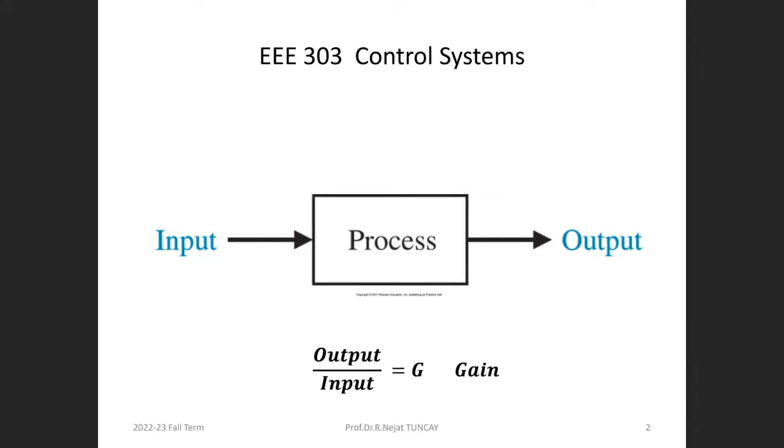I'm sorry. Yes, that's much better now.

Now, input is actually what you wish, and output is the result in every control system. That is your wish, your desire, that is your input. Now we judge whether this output is good enough. You always judge that in every part of your life. If that output is not satisfactory, not the one you expect, what are you going to do? What we do is the subject of the control system. So control system is all about the output being what you require, being equal to what you wish.

A simple example: NASA, for example, sends a missile. You already know that one. Send a missile to a device in orbit and try to hit it with that missile. So this is a control system. If you cannot give the correct trajectory, the correct speed, and also the measures of the space where it is, you cannot hit it. So this is a simple control problem.

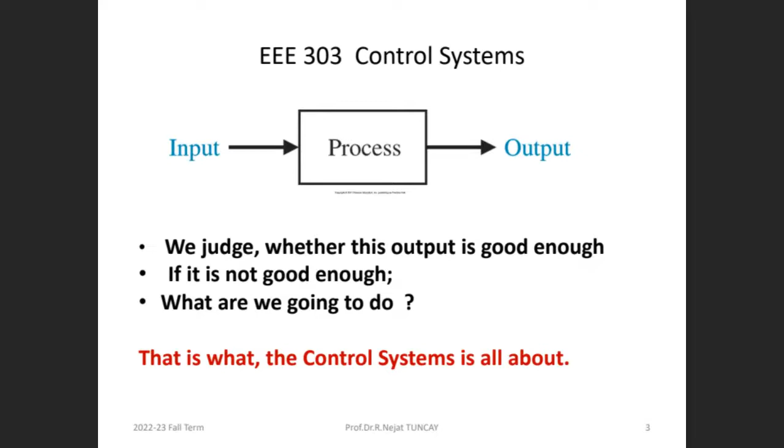If you have 3 blocks like this, or more than 1 block, you remember, if you go back, that one is gain. There is only one output-input relationship. But if you have a number of systems together, then it is called a transfer function. Output divided by input. Don't forget that one. Transfer function. I continue.

We are not happy about this open loop system. Since we just send a signal here or we just give the order here, at the end we obtain, for example, we require a speed for a car of 50 kilometers per hour. However, we control the gas, but it says 60 kilometers per hour. What are you going to do? Then you have to get a signal from there to see whether this output is exactly equal to this required input or not.

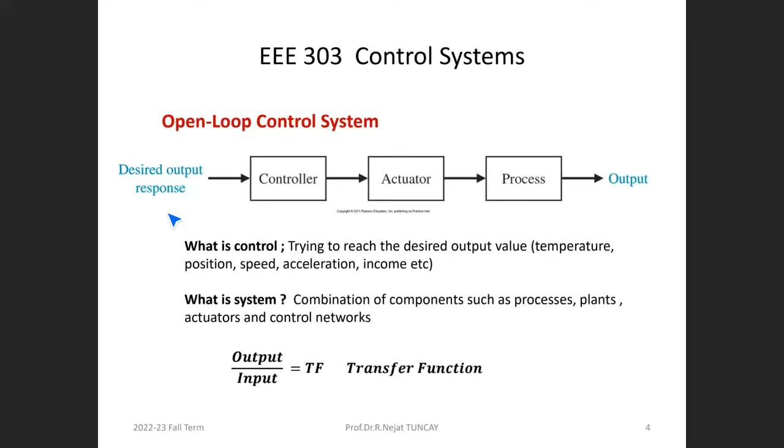I repeat the sentence. This open loop system is not a good control system. Of course you can measure the output, but it cannot be compared with your input. However, if you look at that system, this is a closed loop feedback system. This is the required input and this is the actual output, and you measure the difference, the speed, for example. And of course sensors also have a system. There are equations in it. There are equations in the controller. There are equations in the actuator. I'm sorry.

And you can see that as a result of this one, you obtain a speed of 60 kilometers per hour. However, you wish 50 kilometers per hour, or let's say 80 kilometers per hour, but this is 60 kilometers per hour. So when you measure this one and compare it with the input, 80 minus 60, 20 kilometers per hour is an error. The difference between your wish and the result. Then you change the controller and the actuator and increase the speed. This is what is called a closed loop feedback control system. You are going to deal with closed loop feedback control systems. Don't forget that. Okay.

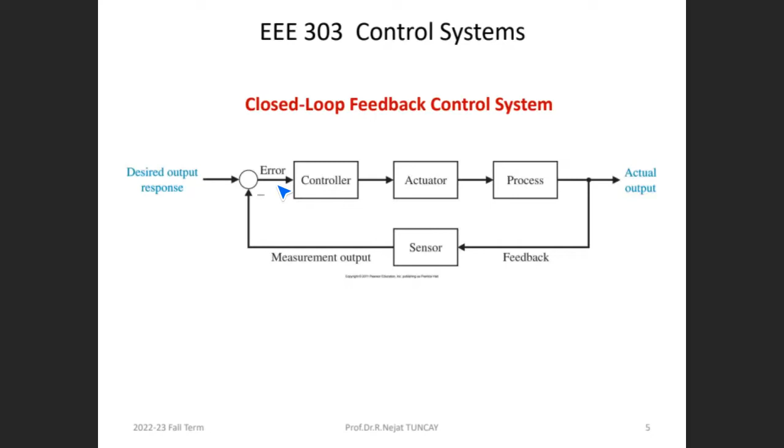When you increase the current, of course, you produce more heat, and the temperature of the water is going to increase and reach that level. So the temperature here is equal to what you wish. So the error becomes 0. It's nice. Then you actually reduce the current, and you reduce the heat given inside the furnace. Then gradually the temperature level goes down, then increases again. So this is a feedback control system where you keep the temperature constant, let's say 90 degrees or 50 degrees, depending upon the application. There need not necessarily be water in it.

One thing I would like to ask you, since during distance teaching I always talk, you may lose concentration. Therefore, from time to time, I'm going to ask you questions. From time to time, I'm going to make that kind of, just a moment, that kind of manipulation. Just a moment, please. Yes, that's right.

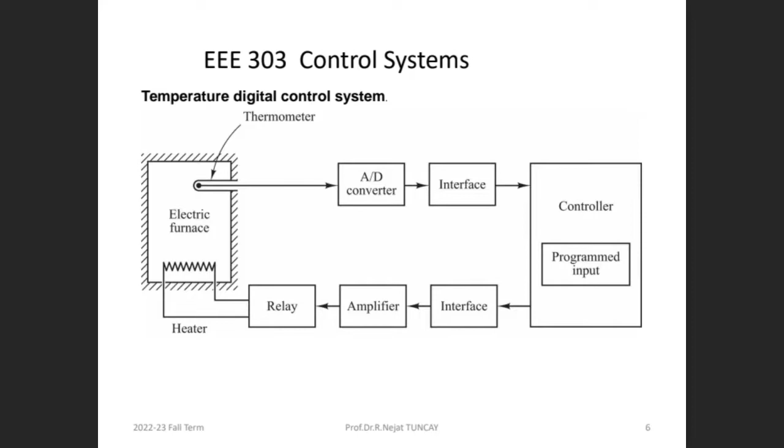Yes, I continue. This is a heating system, a typical control system. There is another example: the disk drive control system. Although the disk drive is now out of fashion, it's an interesting control problem.

Many knowledge, plenty of knowledge is stored already, but I assume that we have two knowledges. One of them is red, saying that the color is red, for example, and the blue one - the color is blue. But this head, just a moment, that head is on top of blue, therefore it's reading blue. But if you want to read the red knowledge, then you have to turn it delta theta, turn it here and come to that point. You understand? So this arm is rotating, but it's only changing the position.

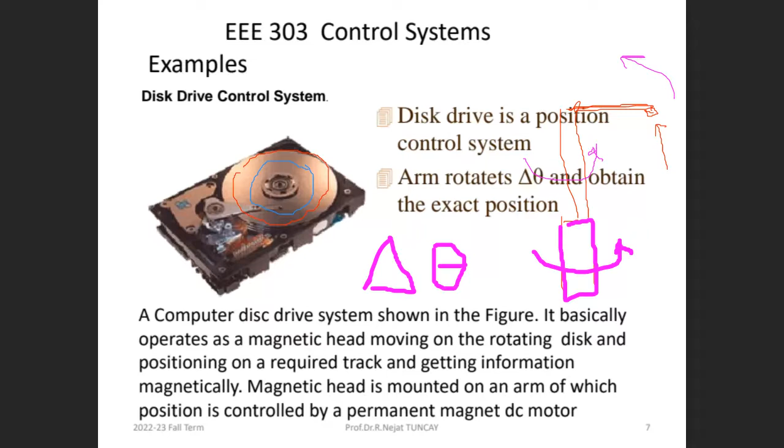But this is a position control system again. In that case, you are involving delta theta rotation. For this case, however, we are involving delta x, linear motion. This is x direction.

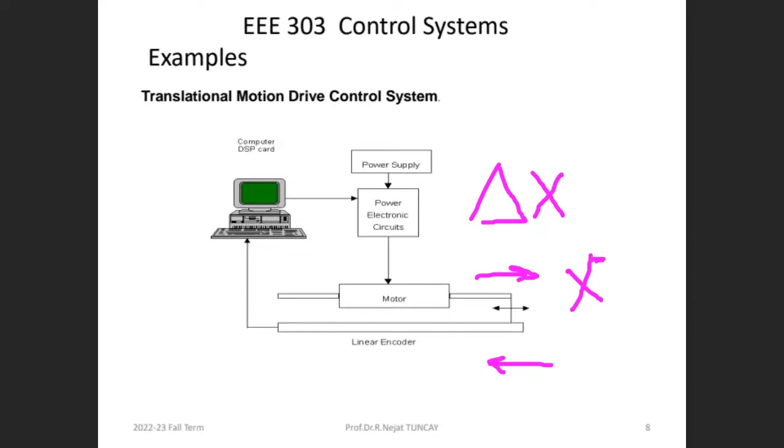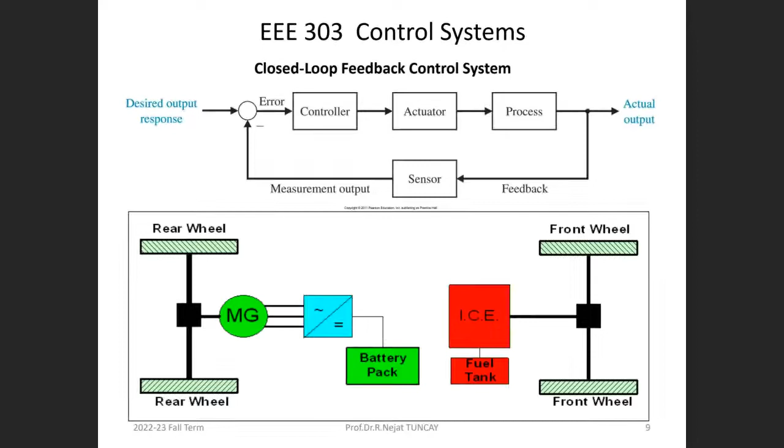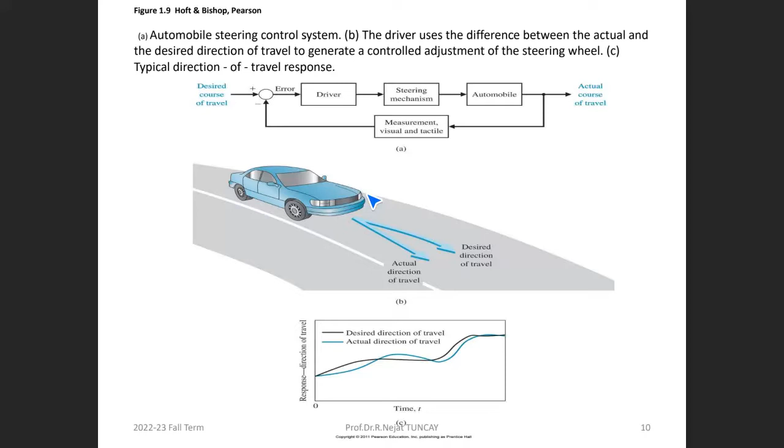However, for starting point, first research and development is done, prototype, preliminary design, and those preliminary designs inside the lab. Then, of course, some experiments, some tests are conducted. Of course, for your lab prototype, the first one you build, you manufacture, is not satisfactory. Then you measure it. You say, all right, there is something wrong with it. This part should be restored. Then you change your design, you produce another prototype. Then at the end, after several tests, you realize that your prototype is good for lab conditions.

Then product design and drafting phase, and also fabrication and assembling line is prepared, and also as a result of that one, another quality control department measures the results, and then this is the product. This product, for example, is let's say a camera, okay, conventional camera.

But when the cell phones are developed, they have very good professional cameras. Then you realize that you send that product knowledge, and you compare it with the required value of the market. You realize that you have to also provide a cell phone. So you cancel the producing. Kodak, for example, used to make cameras like that. Then you start cell phone production.